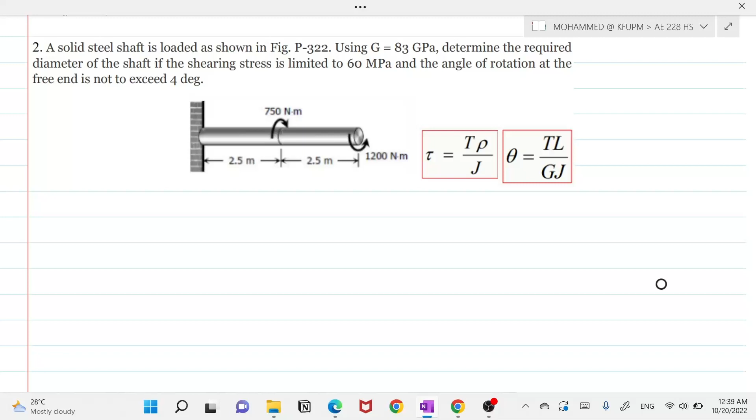في هذا الفيديو إن شاء الله راح أتكلم على problem 1، وهذه البروبلم راح تجمع two concepts في chapter التورجن، وتعتبر صراحة problem جيدة تعرفنا على two main concepts في chapter التورجن. تعتبر هذه المسألة مسألة major exams or final exams بشكل عام.

طيب بسم الله، خلينا نقرأ السؤال. A solid steel shaft, this shaft is not hollow, is loaded as shown in this figure. Using the shear modulus 83 gigapascals, determine the required diameter if the shearing stress is limited to 60 megapascals and the angle of rotation at the free end is not to exceed 4 degrees.

لو لاحظنا في هذا السؤال وركزنا فيه حنلاحظ انه we have two constraints. ليش عندنا two constraints؟ وايش الهدف؟ الهدف انه احنا نبغى نصمم او نبغى نجيب المقاس المناسب لهذا الرد بحيث يقدر يحقق لي الشرطين هذه، انه الشيرنج ستريس عندي ما يزيد عن 60، وبنفس الوقت اذا I applied these loads if I applied them الانجل اوف روتيشن حقي at the free end ما يزيد عن 4 degrees، يا يكون اقل يا يكون 4 بالضبط.

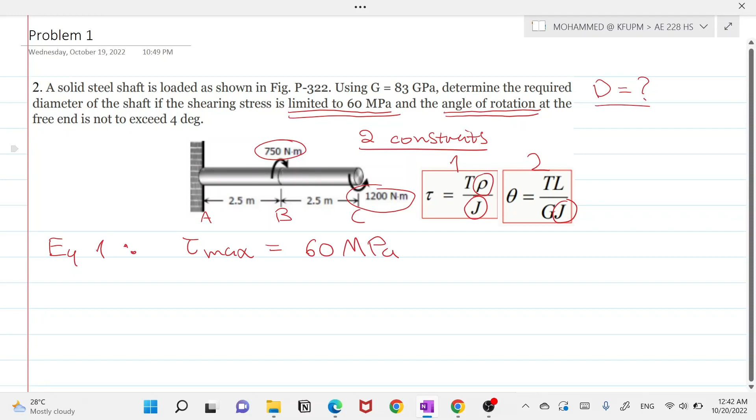طبعا أنا ممكن أستخدم torque diagram، لكن أنا أحب إني أقسم المسألة إلى segments، وأبدأ مثلا من segment BC. السيجمنت BC هو عبارة عن هذا السيجمنت فقط، وعندي التورك هذا اللي هو equal to 1200 newtons times meter. معناته التورك اللي هنا عشان يقاوم هذا التورك لابد يكون تورك في عكس الاتجاه.

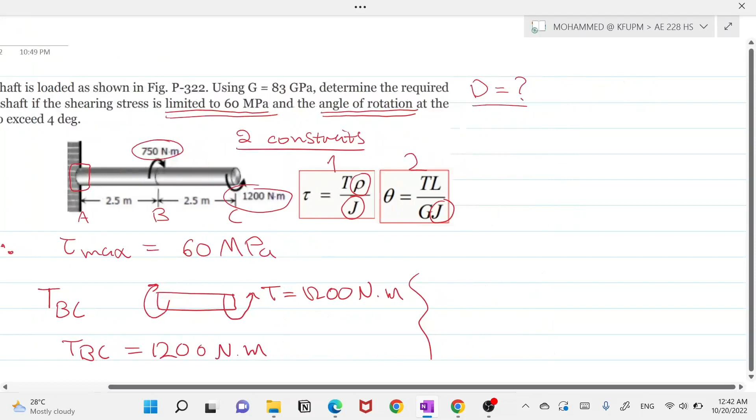تمام، في عكس الاتجاه وبنفس القيمة، معناته TBC should equal 1200 newtons times meter. طيب this is the first segment. The second segment أنا أخذهم كلهم عشان أستطيع أني أجيب التورك at the end، or at the root section of the shaft. So this is for example T at A، ولو لاحظنا انه هذول الاثنين عكس بعض، ولكن هذا الماجنتيود حقه اعلى، معناته الT A لابد تكون في نفس اتجاه الدوران حق ال 750.

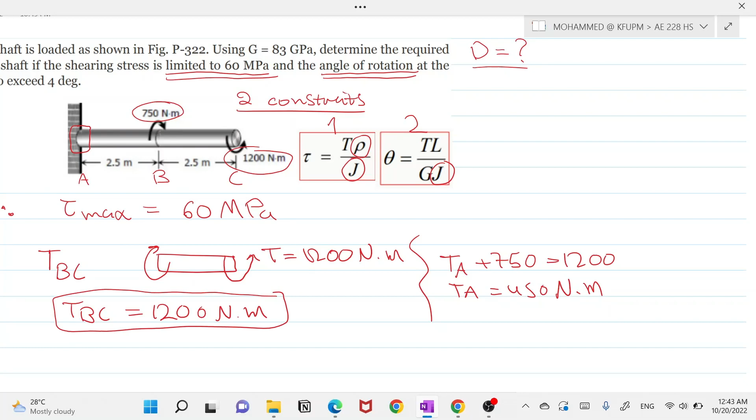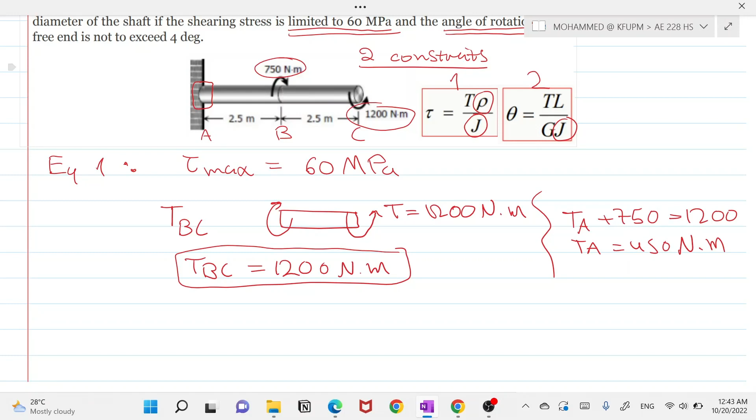طيب 750 and this is 1200، so TA is equal to 450 newtons times meter. طيب معناته من الماكسيمم عندي؟ الماكسيمم هذا. ف in the equation I'll use the maximum torque within all the shaft. طبعا في methods كثيرة اني انا اجيبها، انا جبتها بهذه الطريقة. ممكن انه نستخدم التورك دايجرام حيعطينا نفس الناتج. تمام، طيب الان بما انه انا اعرف انه التاو حقتي should be like this

60 megapascals MPa, and this is equal to 1200، and rho أعرف إنه rho هي d by 2. الj عندي هي الj pi over 32 times d to the power 4.

طبعا هذه equation valid only for a solid shaft, a solid circular shaft. إذا كانت hollow هتختلف المعادلة نوعا ما. فمباشرة خلاص عندي I have this relationship. I just rearrange, I can cross multiply. So when I cross multiply, I'll get the following. I'll have d to the power 4 multiplied by the following value.

60 megapascal is 10 to the power 6 multiplied by pi over 32. So I have this value 5890486.23, and I have طبعا هنا 600 d. d with this will become like that, and d to the power 3 is equal to 600 divided by this value, which is 1.0186 times 10 to the minus 4.

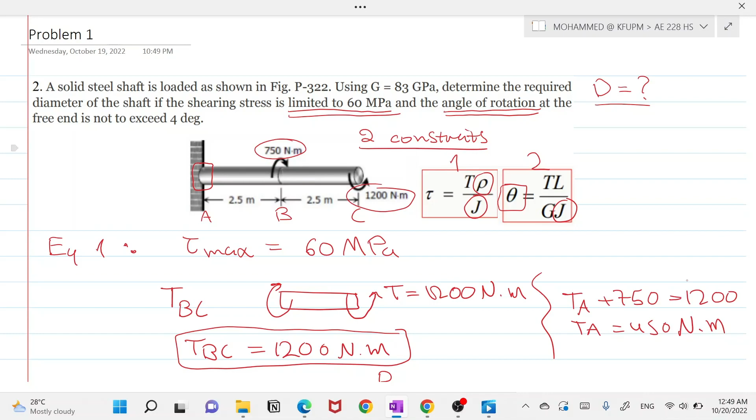I'm not sure if this diameter will also satisfy this one. طيب كيف نتأكد؟ I basically use this same equation وأعتبر إنه الثيتا عندي مجهولة. I don't know my theta. So I solve for theta. يعني أعتبر إنه ما أعطاني هذا ال constraint, and I solve this.

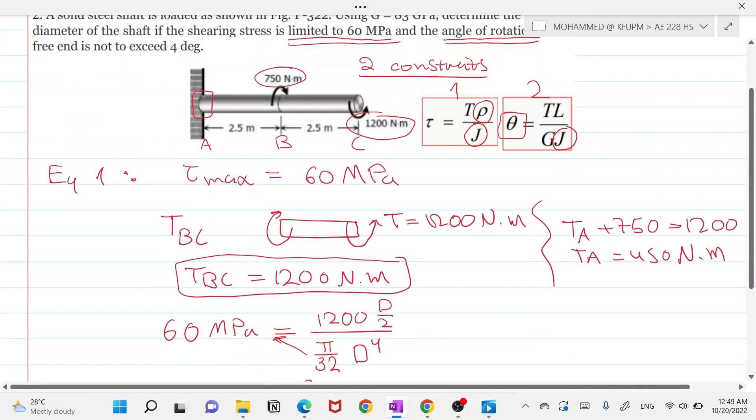Okay, by the way, you don't need to do this, بس يعني مجرد للإكسبلانيشن عشان نفهم أبعاد هذه المسألة وكيف تعتبر مهمة. يعني المسألة هذه في مرحلة مثلا الديزاين ل certain shafts or certain elements within the aircraft.

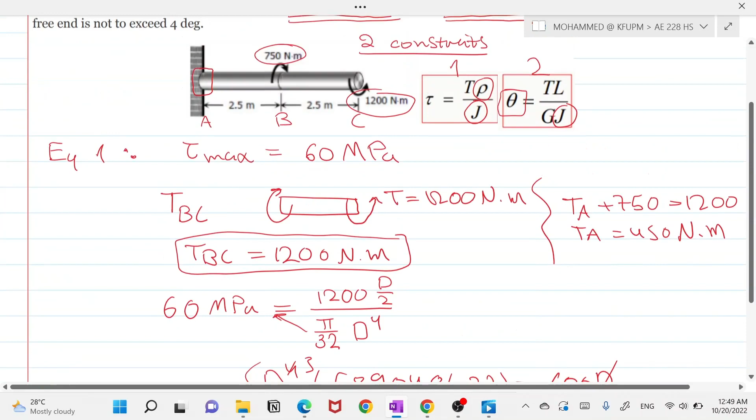So I have T times L over GJ. My G is 83 gigapascals, and my T along the length is different.

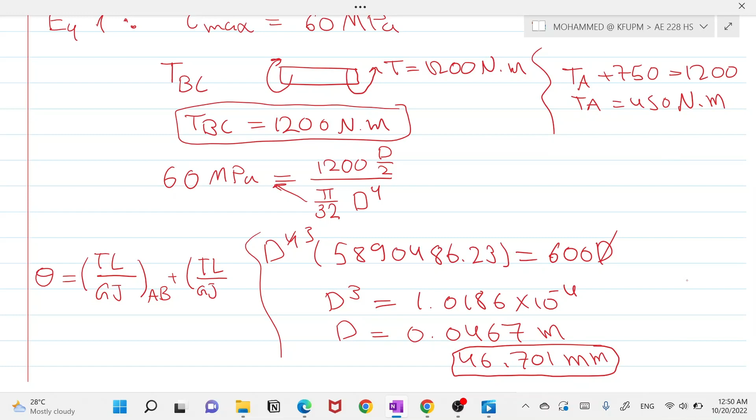So I have two expressions: TL over GJ for AB, and TL over GJ for BC.

The G and J are the same actually, because J is constant for the full shaft and G is also constant for the full shaft, but the torque will be different.

My theta now is equal to the following. So my G is 83 times 10 to the power 9, multiplied by my J, which is pi over 32 multiplied by D to the power 4.

But I'll have a different expression for each part of the shaft. So 450 for the AB, and then I'll have my length.

My length for this one is 2.5, the length will be the same in both directions, 2.5. And then this is 1200 times again 2.5.

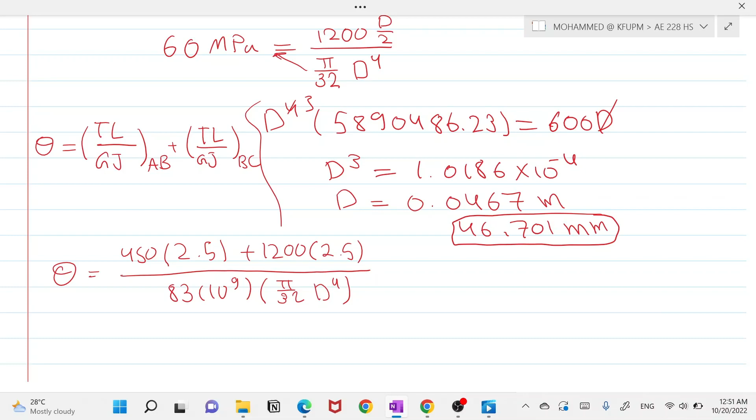Basically that's it, and I know that my D to the power 4 is actually, I can substitute for this right here. If I substitute, I'll get: 450 times 2.5 plus 1200 times 2.5, over 83 times 10 to the power 9 times pi over 32.

I need to be consistent here and not use millimeters, use meters. So 0.0467 to the power 4.

The result comes out to 0.106. You might say this is less than 4 degrees, but no, this is not less than 4 degrees because this is in radians.

So I need to convert this into degrees to compare. This basically is going to be equal to 6.098 degrees, which violates my constraint.

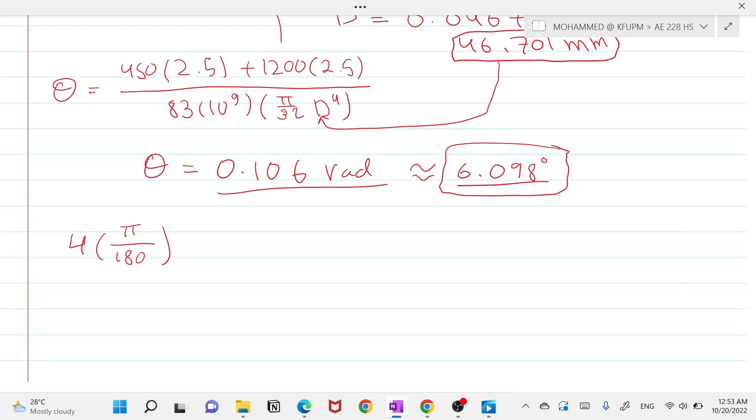But the diameter will be the unknown. So this is 450 times 2.5 plus 1200 times 2.5. This is 83 times 10 to the power 9 times pi over 32 times d to the power 4.

When I simplify this I have 450 times 2.5 plus 1200 times 2.5, divided by 83 times 10 to the power 9 multiplied by pi over 32.

I'll have 5.0622 times 10 to the minus 7 times d4 is equal to, when we simplify this part, I get the following: I get 0.0698.

When I divide this one by 5.0622 times 10 to the minus 7, this should be negative 4, minus 4. Yeah sorry, this should be negative 4.

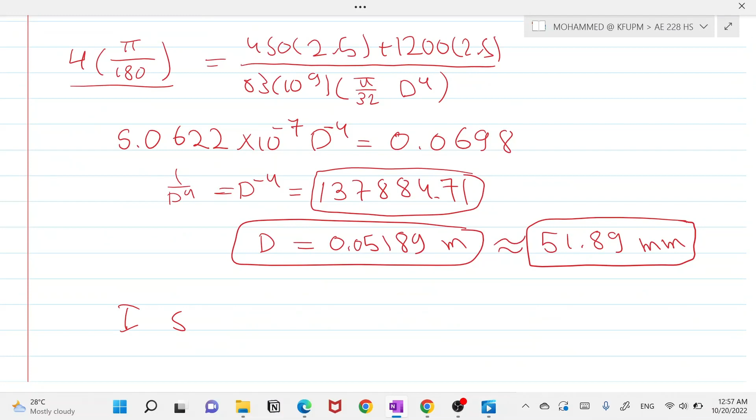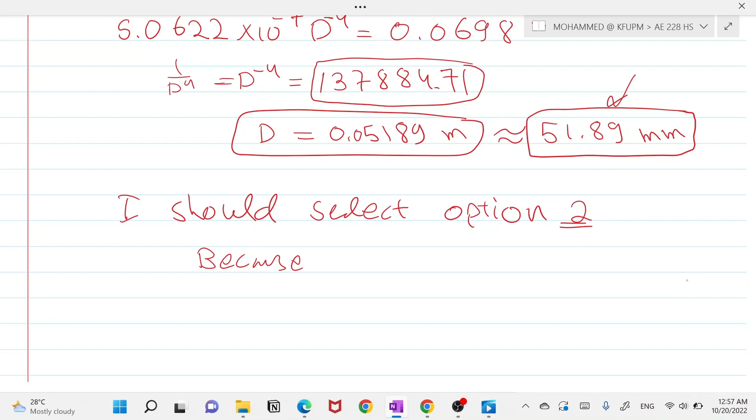Which one? I'm a manufacturing company, I want you to give me the exact number, I want you to tell me which to use, should I use 51.89 or 46? But I would say I should select option 2, which is this one, because it satisfies the two conditions that I started with.